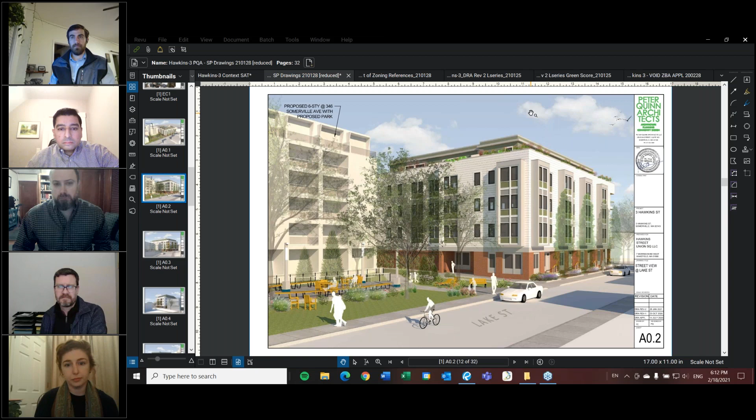With that, I'll take you through some of this, first let me show you the site itself. Can you all see my screen at this point? There we go, it says show my screen, so I'm going to assume that works. I'm now showing a context satellite view of the site.

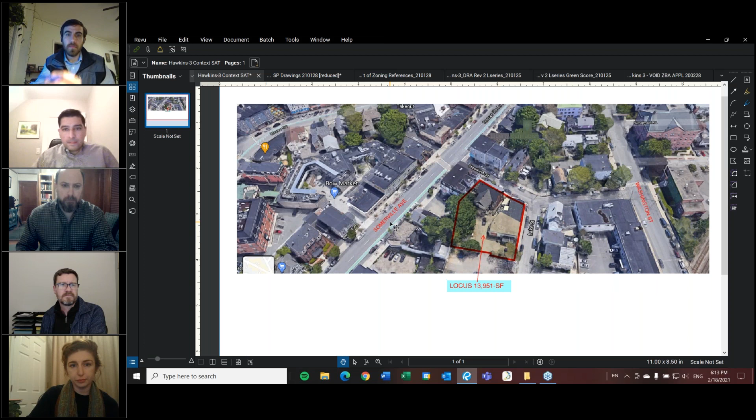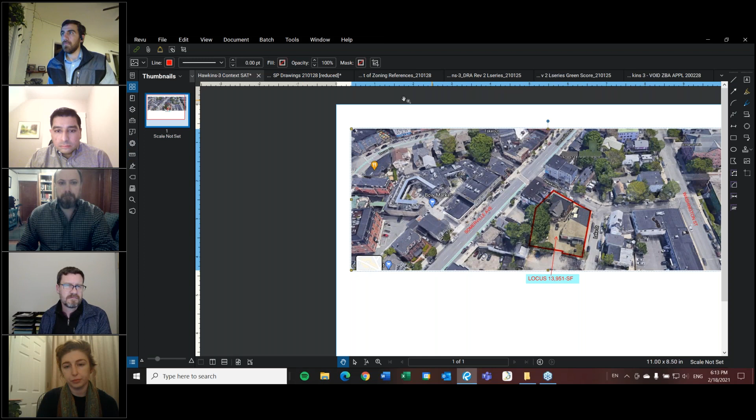You'll see Somerville Ave on the left, and Washington Street on the right. We've outlined the site, which is in a little valley connecting Somerville Ave to Washington, which is Hawkins Street, intersected by Lake at about the midpoint. This is currently an auto body shop, which would come down — we've already received demolition approval for it. Probably no love lost with these buildings.

In the neighborhood there is a 2.5-story wood frame building which has been empty for quite a while, and that would also come down. We received permission from the Historic Preservation Commission for that as well. So this is the auto body shop, it runs down Lake Street, as you can see.

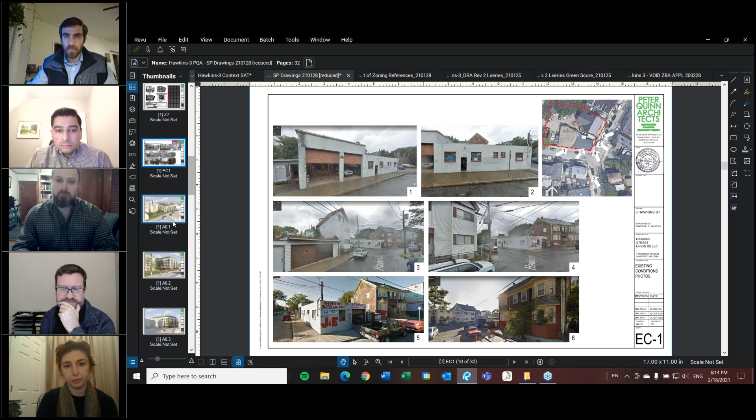The lot area that we have is approximately — hang on a second — 13,000, almost 14,000 square feet, so it's a fairly sizable piece of property. It abuts other MR5 districts, except across the street, where the neighbors are all NR. It has certainly been an industrial site for many, many years. Going back quite a ways, there is some cleanup on the site that has to be done.

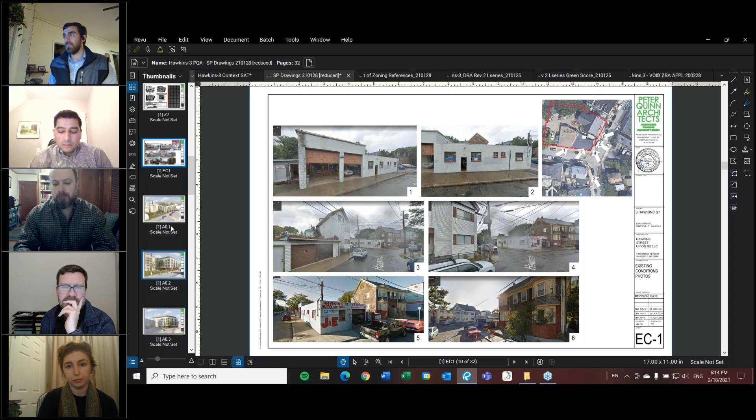We believe that we are compliant with zoning. We did an extensive zoning analysis, looking through all the different aspects of the new zoning. We had to go back quite a few times to get it right. It is quite a bit of material to present.

We also, as you know from the staff report, complied with the mobility report, the sustainable Somerville report, and the landscape urban forestry guidelines for green score.

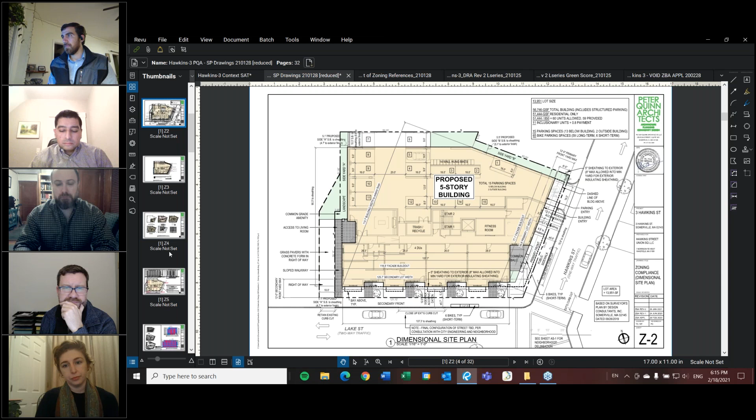The building itself is a 5-story building, but has setbacks. We presented, I think you can see this in this view here, as a 4-story along Lake Street, along the proposed park for the 346 Somerville Ave project, in which we share an elevation. And we stepped back for the 5th floor on these two sides. We've also presented townhouse-like entries for 4 residences along Lake Street to give a sense of scale and neighborhoodness to that streetscape there.

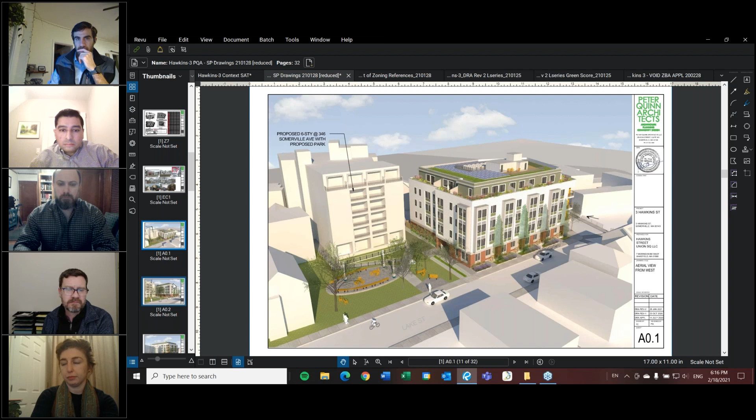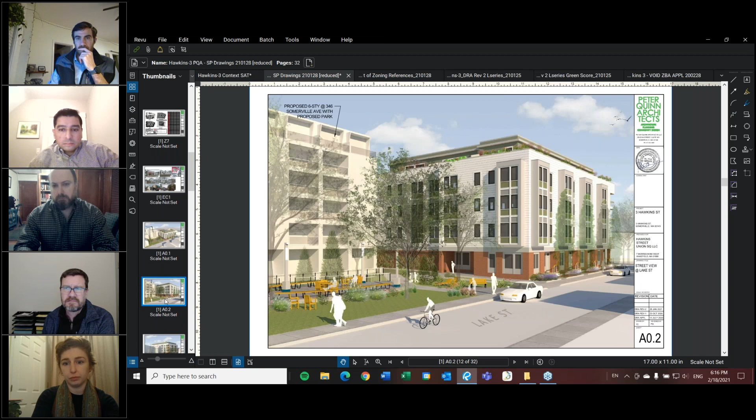Going a little further, this is a corner view that you would see as you come around. Coming down Hawkins, Lake Street is coming in from the left, and then Hawkins continues up to Somerville Ave on the right. So essentially what we have is a strong base made out of brick, and then 3 levels of residential that are outlined in a lighter colored paneling.

And then the 5th floor steps back respectfully on the 3 sides that you see from the street or from the park, in order to create roof balconies as well. And then at the very top, which you don't see in this except for maybe a little bit peeking out, is a common roof deck as well.

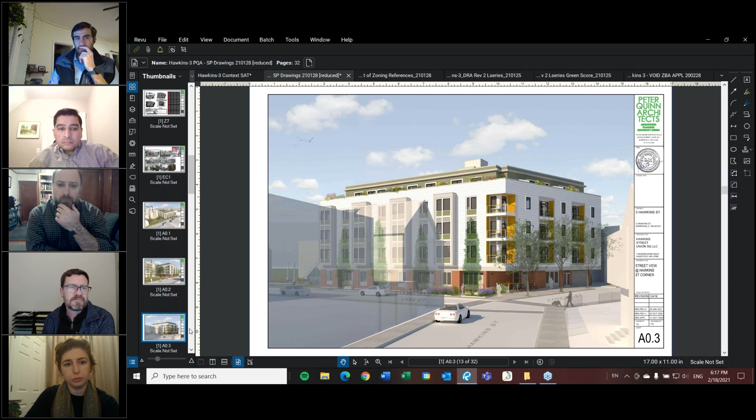There's a view further up Hawkins, actually standing in Somerville Ave. I think we don't show a building here that would block the view, but I just wanted to show essentially the context here.

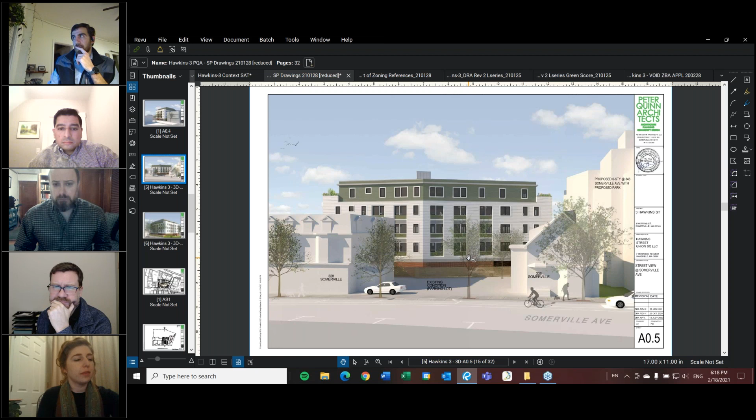And then finally, back from Somerville Ave, looking through what is now a parking lot, you see the side of the building, which is treated a little more plainly. This will eventually, we assume, be blocked by another building. And then finally, there's a corner view from the park itself, looking at the building that we have.

I'll take you through some plans now, especially the ground floor. So the building in this plan, the bottom of the page is Lake Street, and Hawkins Street is on the right. The corner would be coming in from the left-hand side. So the side facing Lake Street, as I mentioned, we create little townhouses that are actually just 1-story, 1-bedroom units with their own entries. They also have entries from the common hallway inside the building.

The interior of the building has a number of amenities. There's a nice lobby looking out to the street, a common balcony that all members can use and interact with neighbors. We also have a common room, which will likely be a small fitness room. And then we have a living room in the back that looks out to the park, which is on the left side of this page. That'll be quite a nice amenity and could be used as a community room as well, open to scheduled meetings with neighborhood people, presentations, and that kind of thing.

We have what I would call an open garage. It's not heated, for 13 cars, and then 2 additional spaces outside that garage for a total of 15 spaces, which gives a ratio of about 0.25 spaces per unit. We're a 59-unit building.

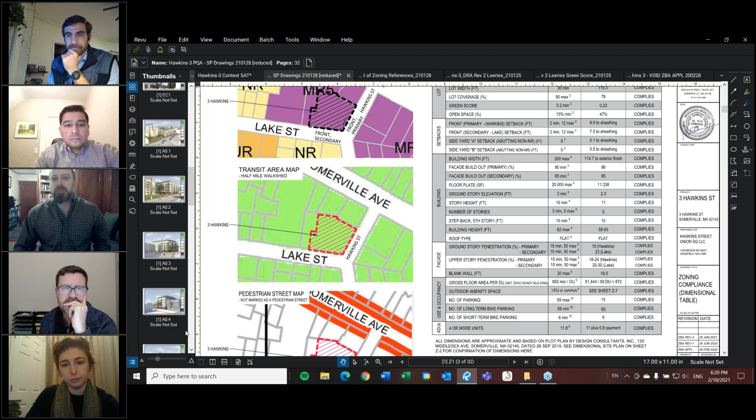Shall I continue? Yes, please. All right, so we have an extensive bike parking program in this building.

We have short-term bike spaces around the perimeter of the building, integrated into the sidewalk areas. We also have wall-hung bikes in the garage itself, and then an oversized elevator to take bikes down to a basement level where we have a very large bike storage room and workshop for repairs and cleaning bikes. We have a large space for storage of cargo bikes or tandems. We can fit those as well.

And we have space to expand the bike program if needed. There would not be a problem to do that. However, this is a limited basement, as I mentioned, the water table is an issue here. So we are just limiting it primarily to this residential use and some utility rooms, this residential bike room and utility rooms.

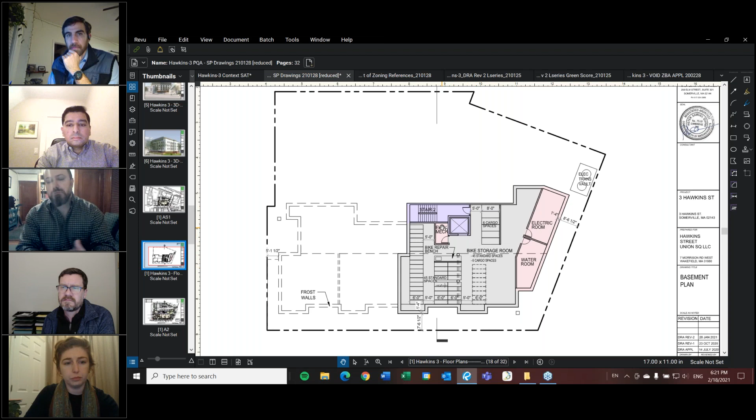The other aspects of this, of course, we're going to pre-wire at least 4 charging stations for electric cars. We do have a package and mail room, which will provide enough space for normal package delivery. That's in this vestibule area.

Moving on a little bit, one of the things that we had misinterpreted on the zoning was the need for a 12-foot wide sidewalk area. Our landscape architect will talk a little bit about how we handled that later on. But what we did is we pushed the building back from our original design in order to create a 12-foot area that could be used for sidewalk.

We left the existing sidewalk as it is and then put in ground cover for that additional area. We did not use that ground cover in our green score calculation, we just provided it as a visual amenity. And we do have some trees planted in that area, which we can talk about later, but the idea was to push the building back in order to not impose the mass of the building so strongly on the sidewalk, and I think we've accomplished that. We've done that by leaving the 12 feet of sidewalk area plus about another 2 feet of setback that's required in this district, so a total of 14 feet from the curb line.

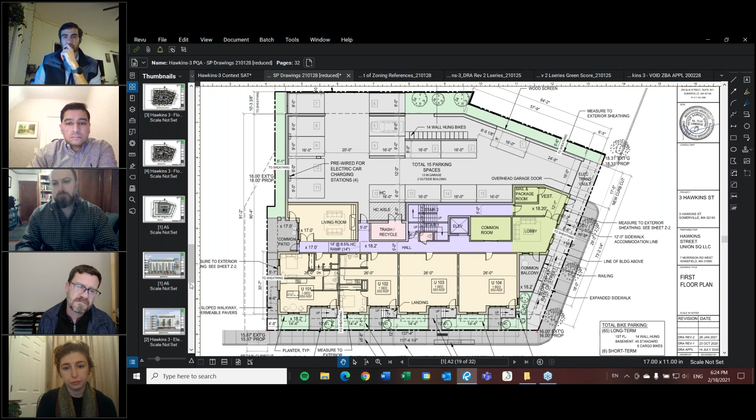Our materials are fairly straightforward. As I mentioned, we do have a pretty significant exterior requirement with the insulation, so we are limited on putting any kind of heavy material on the exterior - we have to be very careful about that because of the cantilevered weight of all that. So we are using a fiber cement lap siding with an 11-inch exposure, which is a little lighter than normal, and then fiber cement panels. We have a brick base, brick veneer base with a sort of contemporary colored mortar, and all the trim is fiber cement as well.

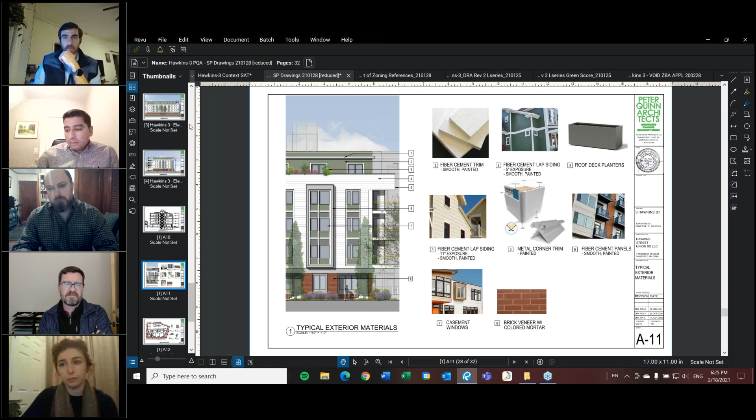We are holding up some pretty significant roof decks, roof planters, so those are actually spec'd as kind of an aesthetic element as well. I should show you the plan for the roof deck.

This has a more ornate version of this, but we've got about 2,000 square feet set up for solar panels generating electricity, and then all of our condensers are collected in the middle of the roof where they will not be visible from the street. And then we have a roof deck which is about 700 square feet, and a small landing and lobby at that area.

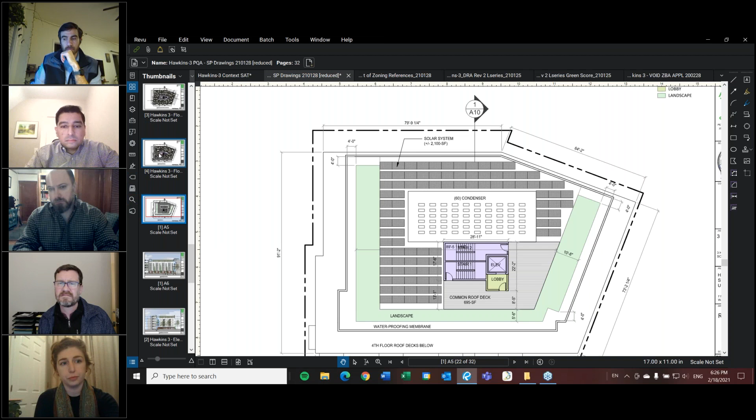So this is open to all of the residents, although some of the units do have their own private balconies, especially on the 5th floor. I think we've exceeded the usable unit open space by quite a bit for this building.

So I just want to mention before I finish the conditions—actually, why don't I come back to that? I'm going to pass the screen to Erin so that she can talk a little bit about the landscape plans as well. I'll bring those up.

Okay, thank you Peter. So delving into the landscape plan with the new setback of the building—yes, Erin Hosseini Fitch from Verdant Landscape Architecture.

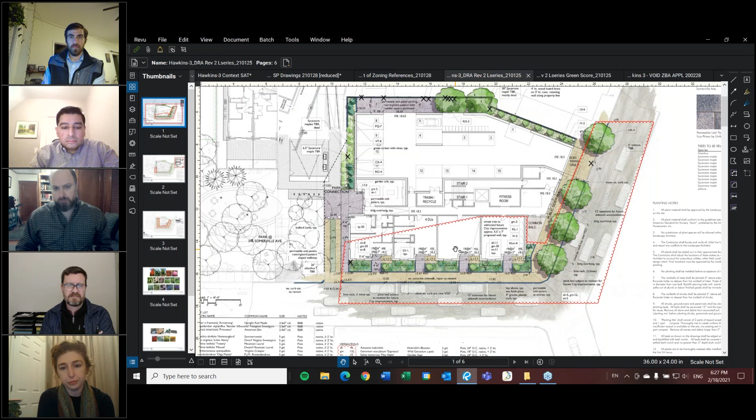With the new building setback, we have a much larger buffer between the building facade and the sidewalk, as Peter mentioned. Within the space, we're able to incorporate a larger plant bed full of mixed perennial plantings, keeping in mind that if any future changes were to happen within the 12-foot easement for the sidewalks, this could easily be done with only the perennial plantings.

Within the space, we're also incorporating deciduous upright trees that complement the architecture but also act as street trees. In the case that the sidewalk was to be widened, the street trees would remain in place, so it'd still be a pleasing path for pedestrians to walk by.

Along Hawkins Street, we're able to maintain a minimum 6-foot width sidewalk along the whole stretch, and we're also proposing large shade trees, making it a very comfortable and pleasant pedestrian streetscape.

Along the northern and western property lines, the plants proposed are used to create year-round screening and privacy for the abutters and for our site as well. Shade trees and upright trees are also used in these instances.

And back on the western property, going toward Lake Street, we are including an accessible connection to the new public park. As Peter mentioned, Verdant is also involved with this, so throughout the entire process we're making sure both of these sites are integrated to create a very residential and community feeling between these two senses of space.

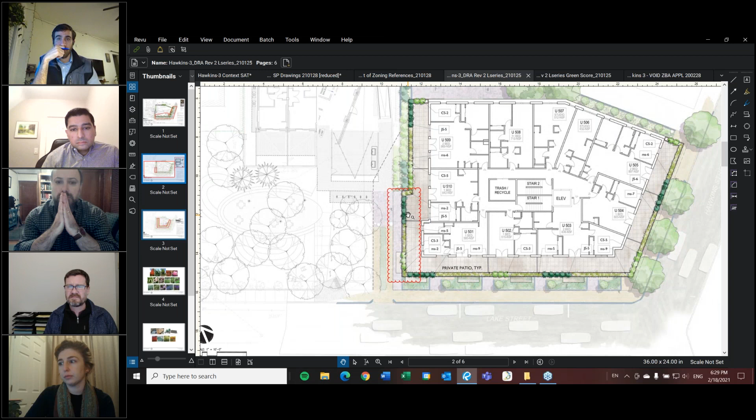Moving on to the 5th floor roof decks—as Peter mentioned, these are private patios for the various units on this floor. Bordering all these patios are planters that will provide year-round screening and interest, as they are not seasonal; they're actually permanent planters that are a mix of shrubs and ornamental grasses.

Moving on to the roof deck, we're proposing an expanse of extensive green roof to create a sustainable environment and also a pleasing aesthetic for those using the common roof deck. We're using sedum-mix trays in this area.

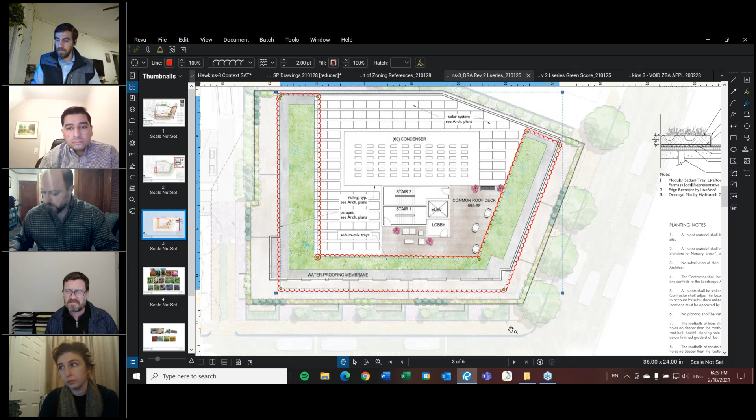A brief overview of our plantings: the majority of the plants selected are hardy native species that will succeed in this environment, with the addition of a few other plantings chosen for their hardiness as well as their aesthetic. You can see the upright tree here, as well as maples and other native species.

Straightforward materials for our roof deck—we're using pedestal pavers. You can also see the year-round interest of the red-twig dogwood and junipers used on the roof decks.

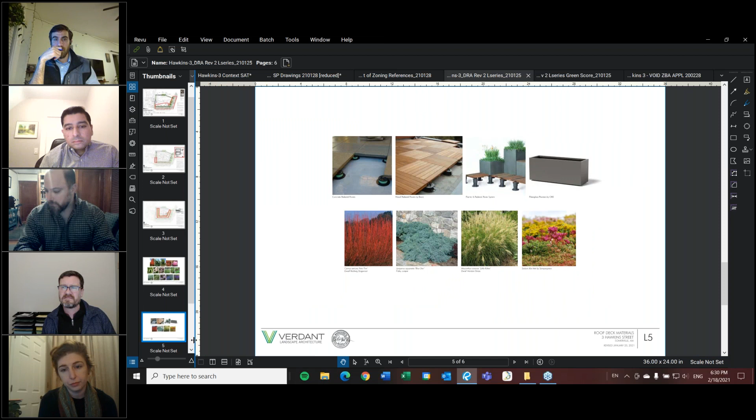And lastly, we have our green score. As you can see, we exceed the minimum requirement of 0.20, reaching 0.23 throughout the 3 landscape plans. On the other set, we have supporting details to show our compliance.

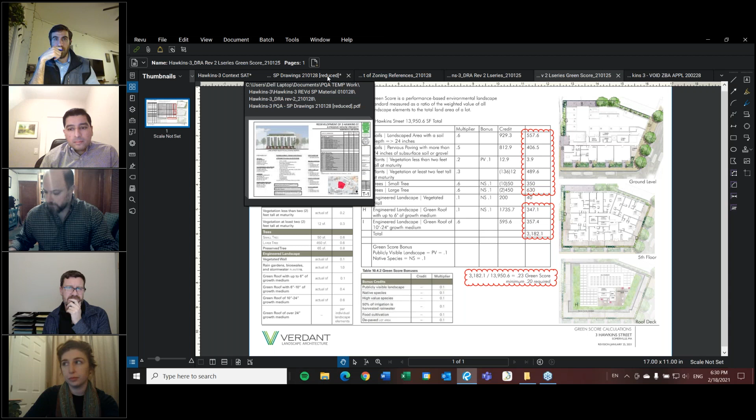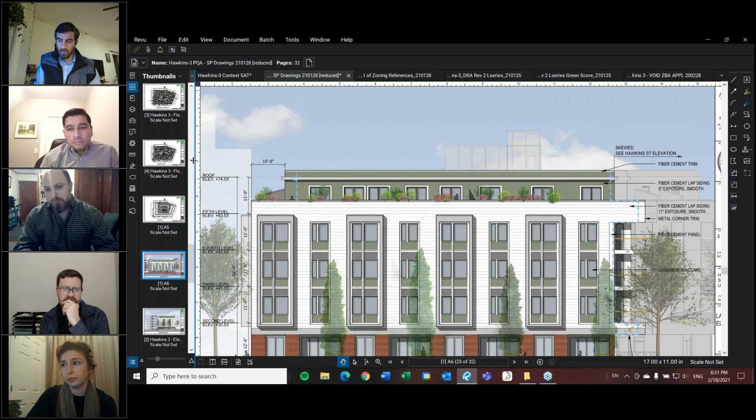Thanks, Erin. So I'll just finish by saying that we have read through the conditions and have no issues with any of them. One issue brought up was traffic mitigation—participating in pedestrian crossings, curb extensions, and the like. This is something we've discussed with the neighborhood from the very beginning, and we'd very much like to engage in that design process with the neighborhood, the engineering department, and traffic department to get that right. So no problem there whatsoever. All the other matters are things we expect to comply with completely.

And I'll pass it back to you folks. Thank you.

So what I'd like to do is open it up to any members of the planning board who would like to ask questions or comments of the development team or of staff at this point. No? Okay, I have questions, but I also plan to hold mine until after the Q&A and public hearing. Great, thanks Rob.

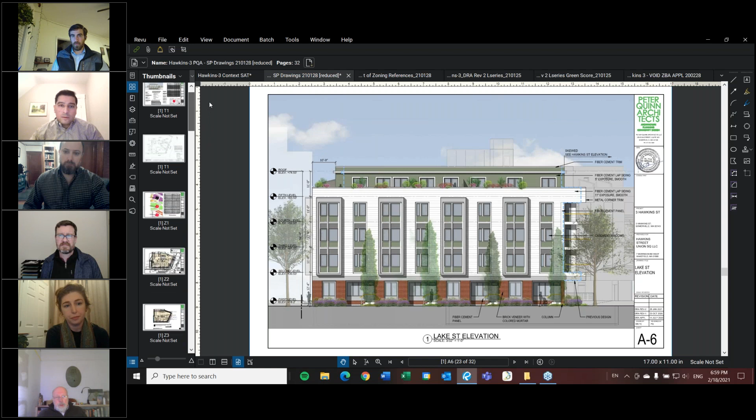All right. Yes, the passive house does limit the amount of window that you're allowed. We pushed it pretty far. That's not really answering the question at hand, but I just do want to say that. So Hawkins Street, as it works right now, has parking on both sides and is fairly tight.

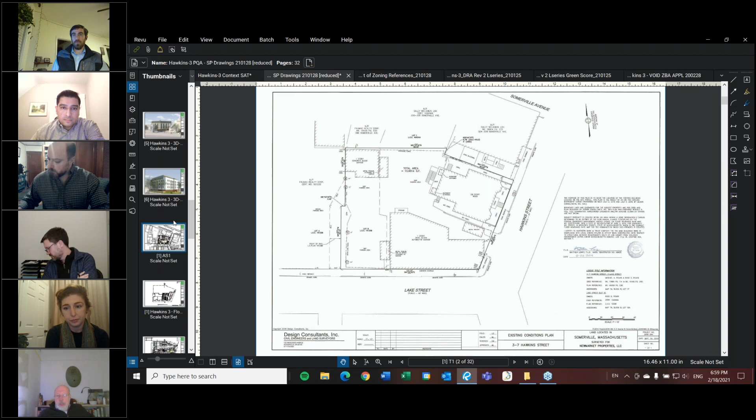We know that, and to JT's point, we had actually proposed reshaping the sidewalk on city property to create a drop off, then have the sidewalk exclusively on the applicant's property. That was a concept we wanted to put out there to the neighborhood. It's something we'd like to see, and we may end up being able to do that in this area. But I think it has to be part of the whole plan to redo these street curbs and create the crossings. This is left over from our original plan, this crossing and raised intersection here.

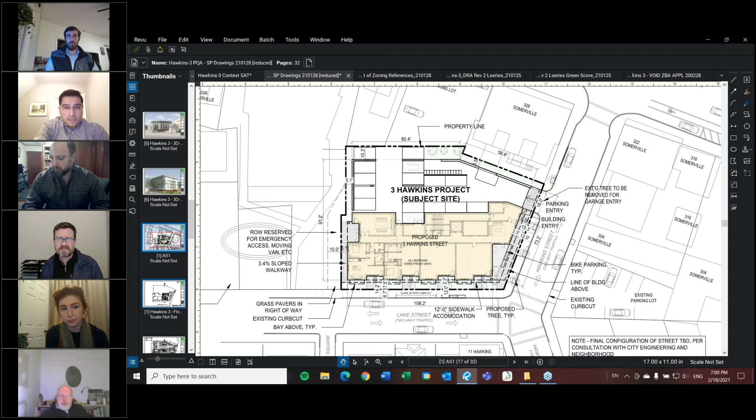So we have a trash room with compactors. It's kind of a funny drawing, bear with me a second. These actually have compactors in them directly, with chutes upstairs that go right into this. So we would be able to bring the trash containers out to the street at the scheduled time. They can park here on the side temporarily in order to meet that moment when they come.

Also, you can see in this drawing there is an electric vault placed in our part of the sidewalk that is all underground. So that is already planned into this process, into this plan. We will not have a transformer that will be on grade, as you see in other developments.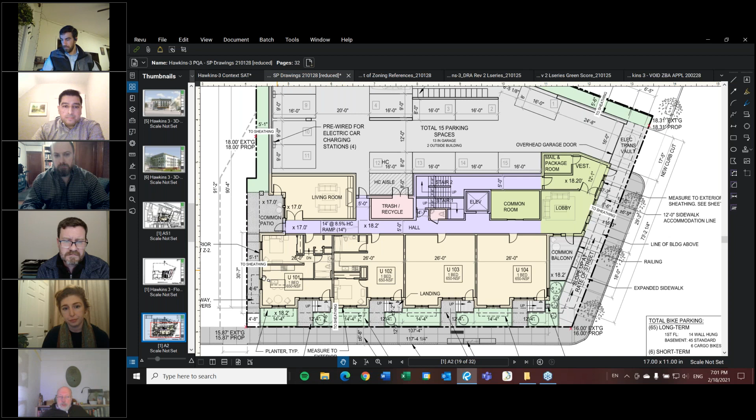Over on this side, what is being referred to by JT and others is that there is a piece of land that is actually on the neighboring property, but it's reserved as a right of way for our lot. So we have proposed to finish it with grass and paver strips.

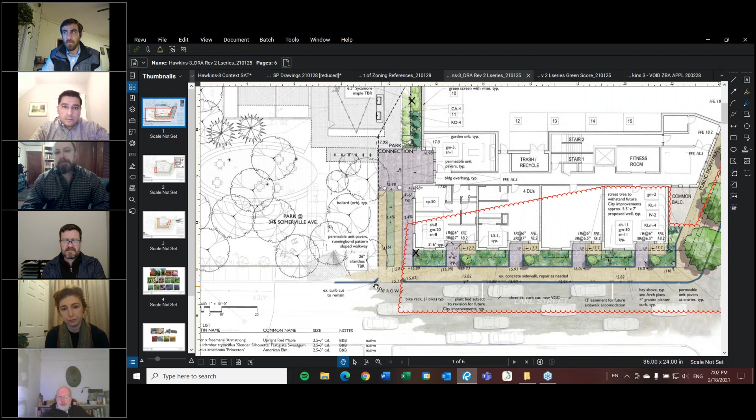This is to be used for emergency access, for moving on a scheduled basis, so that somebody can get in there and leave a small moving truck and come into the building on the secondary entry. But it's not intended to be a regular parking space at all, it would just be used on a temporary basis.

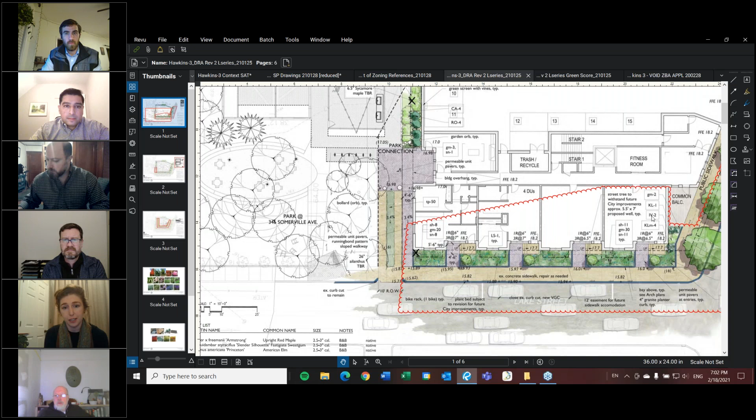I think with that, I may have answered all the questions that have accumulated. I've already said that the brick is full bed. Thank you for the clarification. I think in many or all technical aspects, this is a really fantastic project, so I'm very excited to see it go through these last few steps and move forward. Thank you.

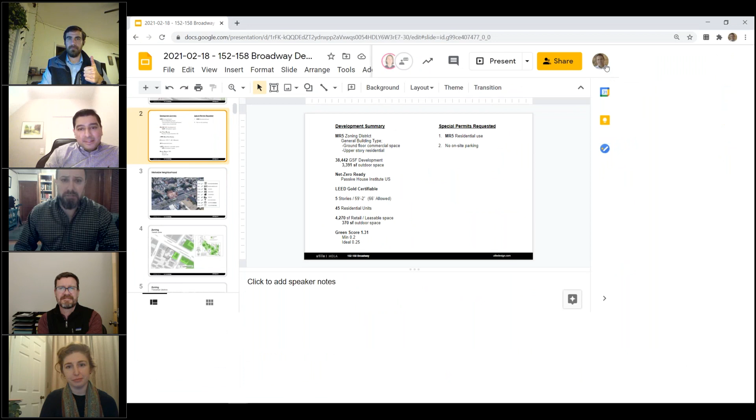Okay. Mr. DiGirolamo, you are self-muted. Hi, I'm sorry, can the board hear me? Rich, before you go, can the board hear me as well? Yes, we can hear you both. Okay, can you see my screen? I'm sorry Rich, I just wanted to—does it show the title slide with 152, 158 Broadway on it? No, it shows a ton of icons on a desktop that's stressing me out. Oh, all right, hold on, I think I might need to—okay, let me know if you see it now. Yes, okay great. All right Rich, sorry about that.

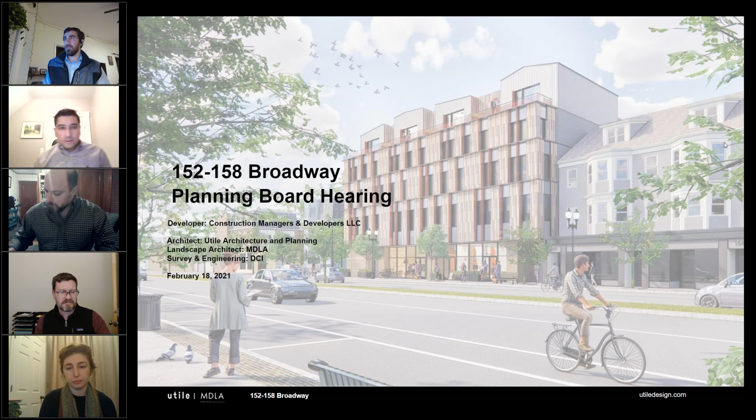Steve Siragusa, who's part of the team who will be presenting shortly, will provide some empirical evidence in that regard. The building is intended to be a rental building. The proposal does provide a total of 58 long-term and short-term bicycle parking spaces.

The project has had extensive neighborhood input. There have been 2 neighborhood meetings, both sponsored by Councilor McLaughlin, and an appearance before the Urban Design Commission, who approved the design and the site. The proposal requires 2 special permits, one for the use, household living, the other for relief from parking. Additionally, we are requiring site plan approval.

Mr. Chairman, our presentation this evening will be by PowerPoint. The PowerPoint will touch upon the zoning criteria needed for your board to make findings on the special permits and on site plan review. At this time, I'd like to introduce the team who will be presenting.

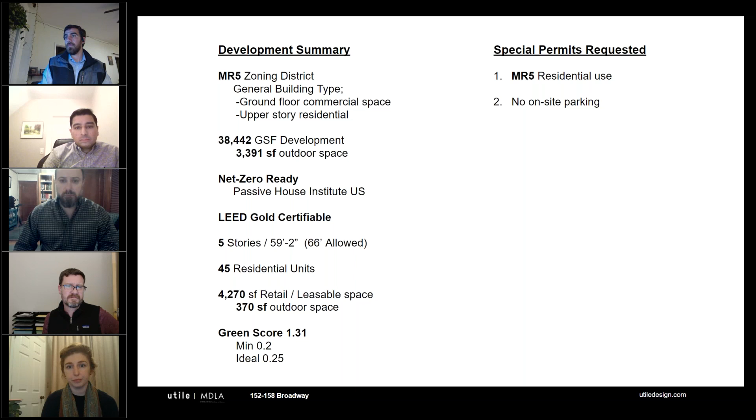I just want to quickly address one of our special permits, which is for no parking here. We did a pretty extensive study of this neighborhood. You all know it really well, I'm sure. But we are just on that brink of being half a mile from the T station. We'll show you exactly where we are relative to the walk zone. We also have, within a few hundred feet, 4 different bus lines. There's grocery stores, post office, convenience stores, takeouts, bars, restaurants, shopping, and park space, all very close by to this site. It's an eminently walkable site.

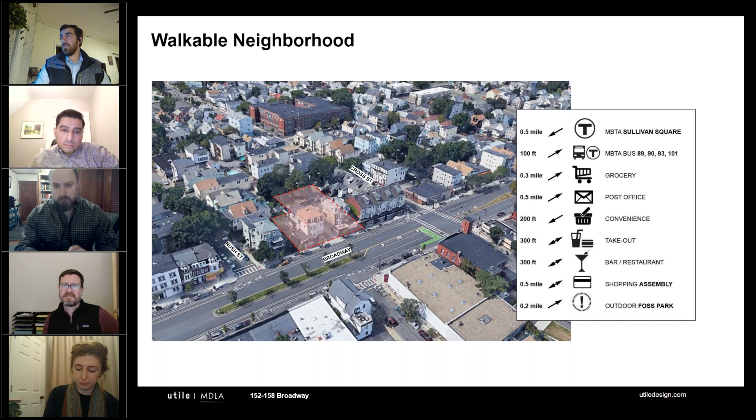This site is designated in the pedestrian zone, one that we think is going to be a great place to live without a vehicle. I'm going to hand it over to Steve to talk a little bit more about the parking and transit issues.

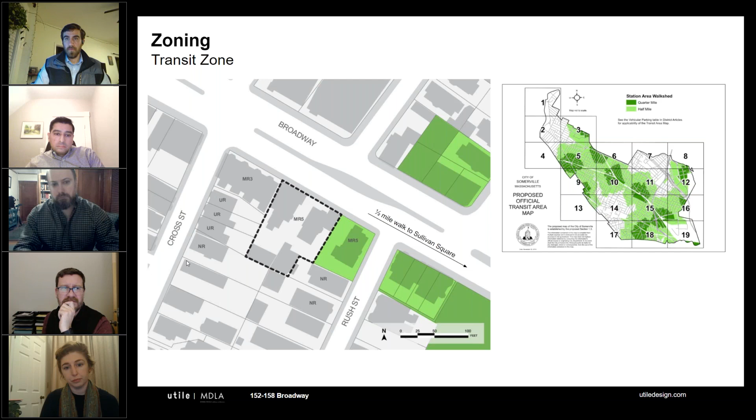As Rich and Michael were both saying, we're located just adjacent to that 0.5 mile transit area, which would be the Sullivan Square Walkshed. If within that area, as you guys are aware, we wouldn't need any parking required on site. So that is what we're proposing. Again, as Michael was saying, we're located along a pedestrian street which connects directly to Sullivan Square as well as Central Broadway. There's 4 bus routes within 100 feet of the site, and 4 additional routes within a half mile of the site.

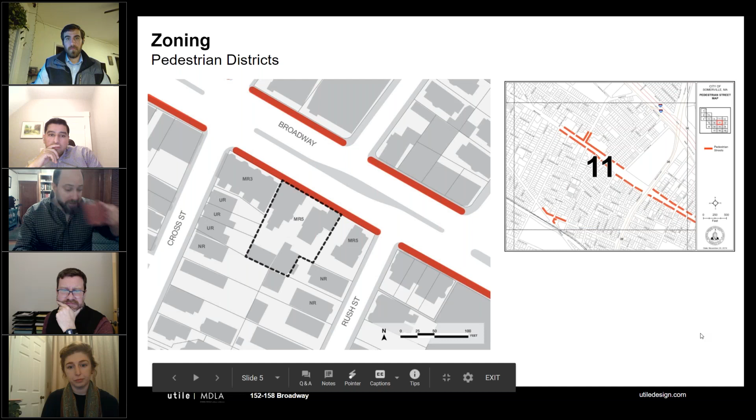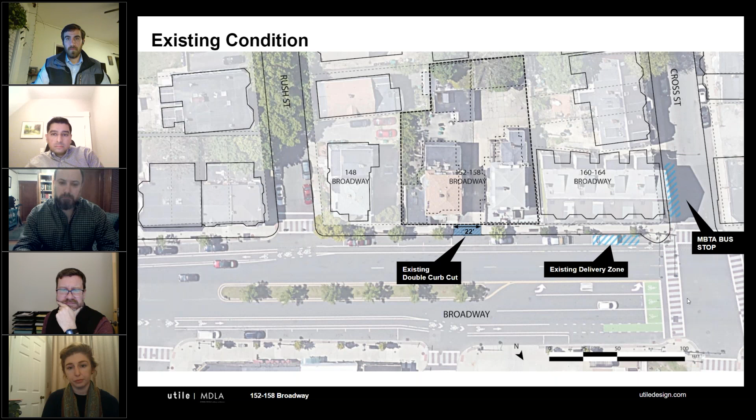We're closing a curb cut, as you'll see on the next slide. It's desirable in this zone, the MR5 district, that no new developments have a curb cut along a designated pedestrian street. So what we're proposing is to close that double curb cut, which is 22 feet wide now and serves 2 separate driveways.

Instead, we'll create an additional loading zone along Broadway. I know that's a concern, but we want pickup drop-offs for Uber, Lyft, deliveries, without on-site parking. We will not be getting rid of any on-street parking along Broadway — there will still be 4 metered parking spaces. We'll just be shifting them west towards McGrath Highway and creating a 30-foot loading zone at the corner of Rush Street.

There's no on-site parking, but it's expected there will still be vehicle trips to the site — move in, move out, ride shares, food deliveries, and things like that. We worked directly with the mobility department to come up with this design, and they've approved it through the mobility management plan we put together, so it's already been vetted. We think this is a good compromise to keep all the on-street parking while accommodating those inevitable vehicle trips.

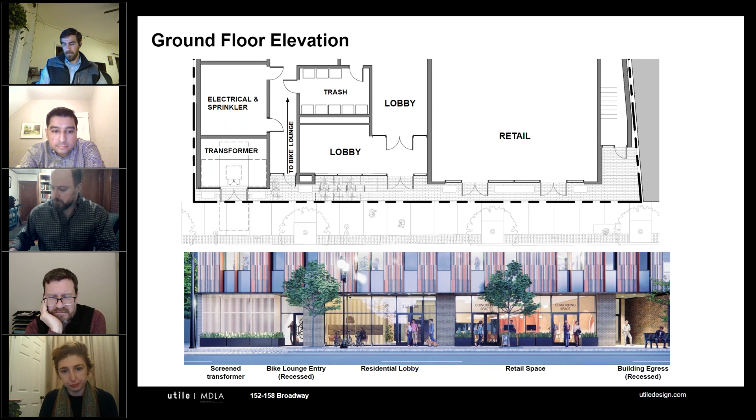So just getting into the unit mix, we have 33 market rate studio units, 7 affordable studio units, 2 affordable 3-bedroom family units, and then 3 one-bed units for a total of 45.

These are all going to be really well designed, very attractive units that we think will be attractive to young professionals and seniors who are wanting to live without roommates. We think this is a really important characteristic of this building, particularly in the event of another quarantine.

I can tell you, some of the young architects who work in our office have roommates who either work at a restaurant or grocery store, and that gets them very nervous. They don't feel comfortable with that, or they have roommates who are also on Zoom calls all day long, making it very difficult for them to be in the same apartment.

So this we feel is a pretty desirable opportunity for people to be able to live on their own. This also takes the burden off of a lot of the existing family units in the neighborhood, which should be used for families, and weren't really designed for a single or a couple to be living in.

These types of units are explicitly encouraged in the new zoning in these pedestrian zones, particularly on the upper floors. We're conforming to all of the side yards, front yards, backyards, and the step backs as we move up and down the building. Just wanted to point out a few things here.

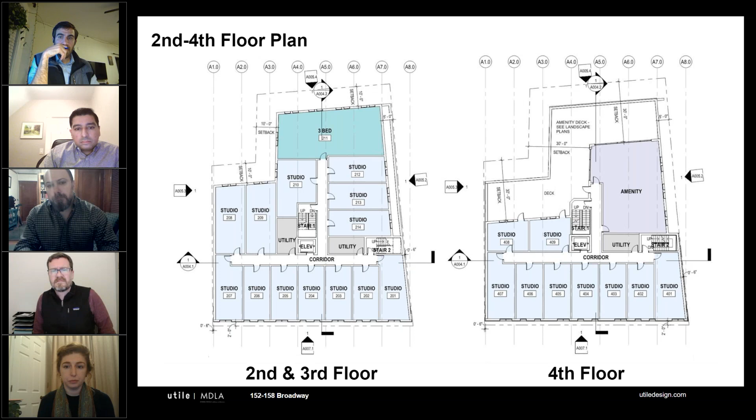You can see how we're laying out the studios, and how the 3-beds lay out on the sunny side of the building. Up on the 4th floor where we have to step back, we're using that as an opportunity to create a really great amenity space for the building as well as outdoor space. You'll see that in more detail, how that outdoor space lays out from the landscape architect. And with that, I'll hand it off to Michael to talk about the landscape.

Michael, you there? I think I'm unmuted now. Good evening, everyone. I'm Mike D'Angelo, landscape architect. So we're opening this slide up.

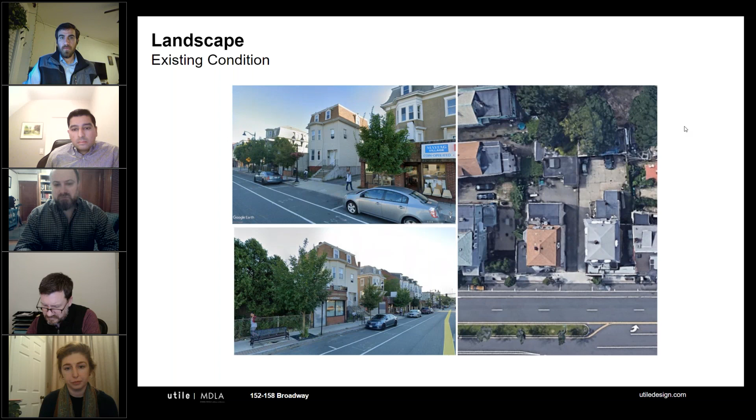This is the existing conditions, just to show that existing curb cut that we will be closing. Generally speaking, the idea for our landscape design along the streetscape is to fill in that curb cut, continue that brick strip along the curb, and continue the streetscape that the city of Somerville has already developed in that area.

Next slide, please. So here's the plan. You can see that curb cut has been filled in, and we're matching the existing streetscape treatment. There's some existing benches, some light poles, some existing trees which are in really good shape that we will definitely try to do our best to maintain and use best practices.

Along the building facade, you'll see we have some special pavers. We're using permeable plank pavers. There's some additional outdoor bike racks in the front there, as well as some movable planters along the front to introduce some green along that facade.

In the rear of the building, as Michael mentions, we have this really cool outdoor workstation for bikes on the left side there, which works nicely with the interior program with the bike storage area. You'll also see a small dog run, and an area adjacent to the retail - we're not sure what that retail is going to be, but it's a nice little outdoor space for them back there. Surrounding the back property line is a row of 47 fastigiate hornbeam trees to really provide a lot of green to that property line edge.

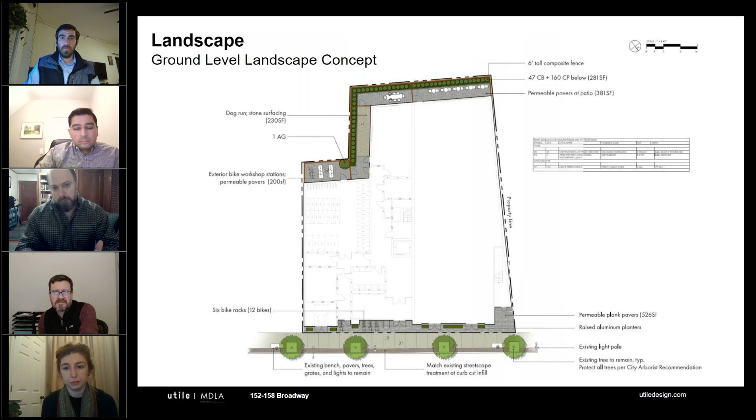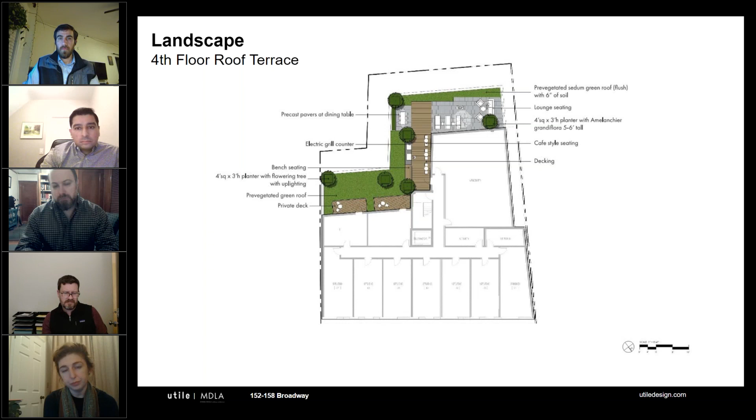Next slide, please. This is the 4th floor amenity terrace. You'll see that the large green area is vegetated green roof, so sedum. There's a couple private decks on the left, and to the right, that's the common amenity space adjacent to the interior common amenity space. There's a couple electric grills, a dining area, a place to sit down, a lounge area, and some chaise lounge chairs, so multiple groups could use that space at one time given the different programming.

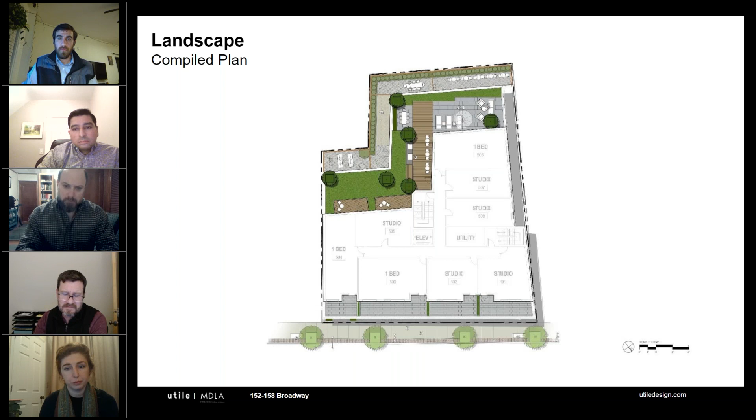Next slide, please. And this is the compiled plan, just to show you the amount of green that we have on this project. It shows all of the green spaces on one sheet. Next slide, please.

That's it, so that's all we have. We wanted to keep it short because we know your time's valuable. And if you have any questions, please let us know.

Thank you. I will have comments and I will have questions. As I have previously said, I try to reserve mine until we've heard public testimony. If members of the board have questions at this time, I would invite you to ask them. Otherwise, I will ask staff - I think Rebecca, this was yours.

Mr. Chair, this is Rebecca speaking. I don't have anything particular to add. I will note that there is a Mr. Tom Lamar who has indicated that he wants to speak by raising his hand, but I think he may not be part of the applicant team, as I understand it.

Okay, well, no, I do not see - I see a question, but that's not part of the record. Mr. Lamar is confirming that he is a member of the public.

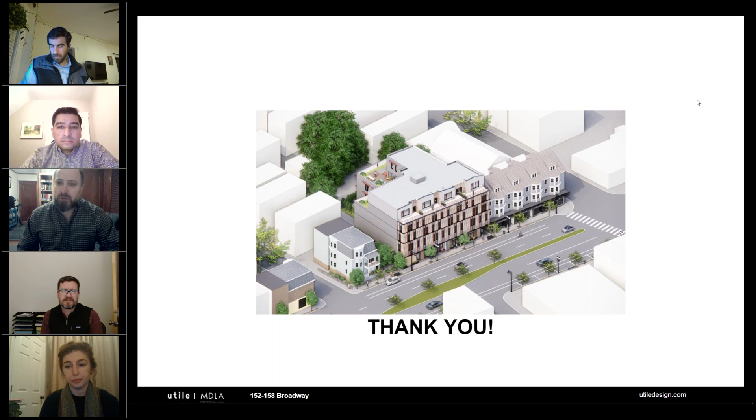Okay, so at this time, what I'd like to do is open up the hearing to anyone in the audience that wants to speak in support of the application. Please raise your hand and I will call on you in the order in which I see you. Right now I see two - I see Tom Lamar and I see Jeff Burns.

So I'm going to call on Mr. Burns first, because I saw him first. So if Jeff Burns could please be unmuted. As a reminder, you have a 2-minute time, and please introduce yourself and give your residential address for the record.

Hi, I'm Jeff Burns. I live at 294 Summer Street, and I want to speak in favor of this proposal. Similar to the Hawkins Street proposal, this one leans into the same things that our zoning is set up to encourage. Obviously, being just outside of the half-mile transit-oriented zoning area, it does need a little extra permission to do what it says to do, which is zero parking, which goes beyond what the Hawkins Street proposal offers with its small but still somewhat parking.

As someone who's lived in Somerville for a while without a car at all, and has lived in the area without a car for almost 20 years, I think this is great. I think there's lots of folks who would really love to have a place where they go where, hey, I don't have a car, I don't need a car. It's close to a train station, it's close to buses, it's got lots of bike amenities. This is my spot, this is for me. Because there aren't a lot of places that really lean into that, and here is one.

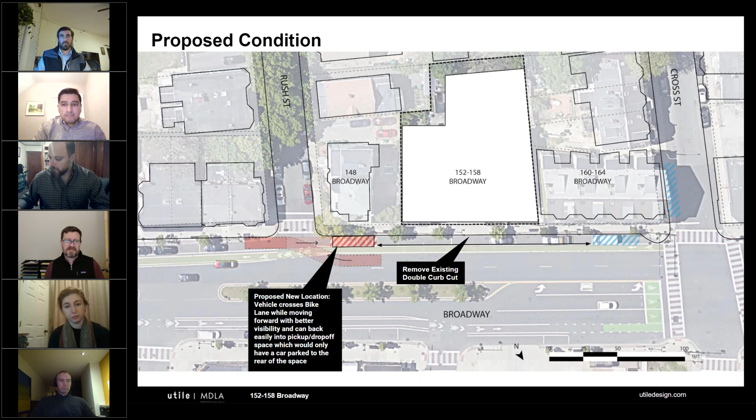Yes, Mr. Chair, this is Rebecca Cooper. Through you to Member Habib, I will note that there is an exemption for parking requirements. I never want to quote numbers, but this does not meet the threshold for requiring parking for retail use of that space. Great, thank you very much.

Okay, wonderful. There were just a couple other comments if you wanted me to address those. I would welcome you to address anything that you think is important for this board to hear.

I did want to talk about the penthouse, because I know it isn't what you would consider the typical design solution. When we went through it with the UDC, they were more than pleased with that particular part of the project, and felt like it was a far superior solution, one that they wouldn't have thought of and one that they really quite liked. It gave a sort of breakdown of scale, a breakdown of a hard cornice line at the very top of the building, and they really did quite like the contextual references of it. So I understand it isn't probably the standard, the kind of ubiquitous solution you'd see most anywhere, but it was one the UDC was particularly supportive of and in favor of. Just wanted to make sure we let you know that.

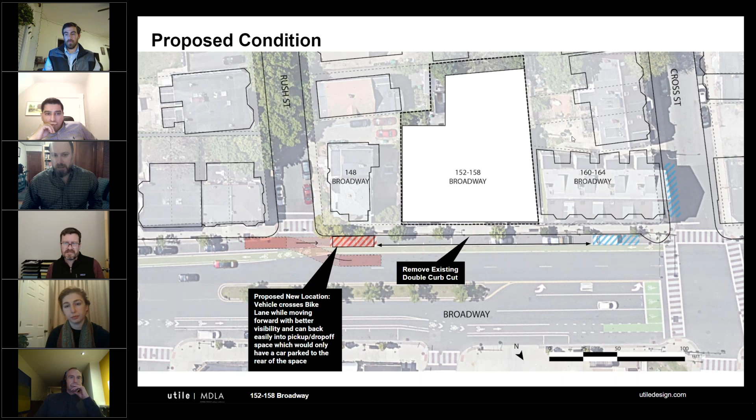I don't think there were any others. I think there was really parking, loading, we talked about unit sizes, and then just those couple of design issues. Was there anything else? There was not, but as I'm scrolling through your plans now, there was one that I had actually thought of and neglected to raise when I spoke earlier.

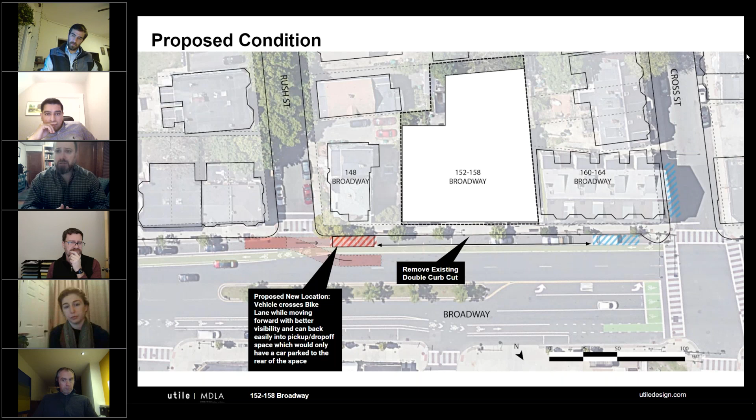So if you wouldn't mind this concern, as I'm scrolling through your plans right now, it doesn't appear as though—and maybe your images can ameliorate my concern—that the sides of your buildings look particularly plain. That is concerning to me because traditionally this board has requested that all sides of the building that people can see, even if it's in the back of the building, if it faces the highway for example, looks like something that's not just a blank slate. So my concern is that it just looks like nothing on the sides of the building, particularly when you've got a street in between you and someone else.

It's not like the image you've got up here where one side of the building is largely obscured by the building next to it on the right. I'd like to see a rendering where at least the sides of the building that people are going to see look like something that's not just a blank wall. I don't know if you were intending to put up lighting or artwork or anything—I understand you're not necessarily going to put windows there because I'm not sure what's on that side of the building—but anything that doesn't look just like a blank wall. I meant to raise that earlier, and I'm sorry I didn't at that time. I was kind of scrolling through the application again before we move on from it this evening.

And I'd hope that you could address that, because including buildings that have been built under the new zoning in Union Square, where the backs of the buildings abutted other buildings and other streets, this board required that the backs of the buildings look like something that weren't just backs of buildings.

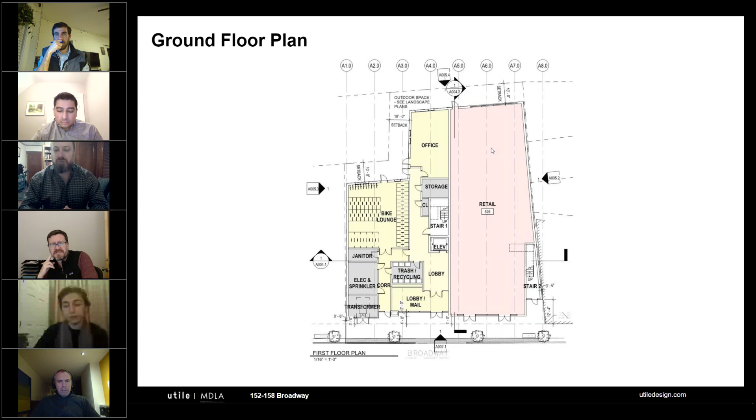What I would ask then, Mr. Lund, is the next time you come before us in a few weeks, because I'm going to ask the record to be left open for written testimony as well, I'd like somebody to give us, if meeting in person, the materials you intend to use. But I do have a board at the back here which would show the materials. Hold on.

Here we go. Okay, so this is going to be the brick along the front at the ground floor. This is the öko skin detail I was talking about earlier. The composite aluminum panel, which would be just below the windows, is a kind of really robust, expensive version of a metal panel that will anchor where the windows are relative to the floors. This is the cementitious clapboard we'd be using on the sides of the building, and up at the very top, this is the standing seam metal roof. So I don't know if that helps at all.

That actually does help me a little bit, because it wasn't apparent with the renderings shown earlier. I don't know, it looks like we've got... I think Rob raised his hand.

I'd like to hear the members' comments as well as staff's on the materiality being used, because it's always something that's a concern to me, without a guarantee that the building next to you is going to cover that up in 2 years.

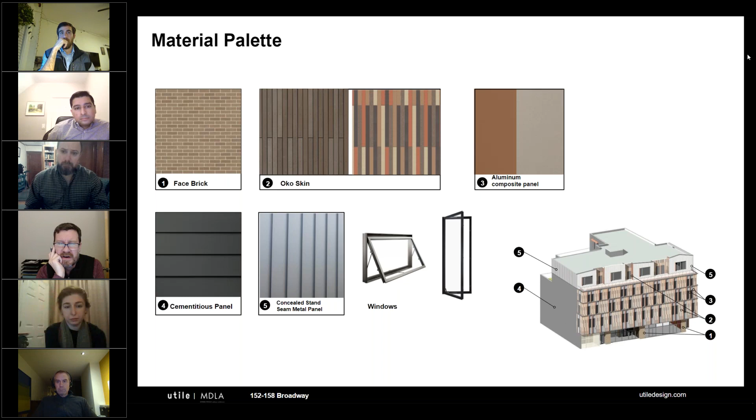Yeah, I would just say, on this very point, I don't know, Mr. LeBlanc, or who's in charge of the slides, but if you could go back to that view looking, I guess, west, that you had up just of the rendering.

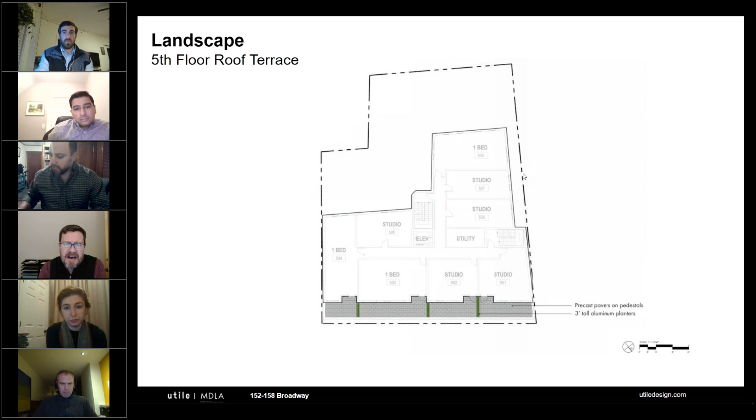It was, back a few more. This one or this one? Yeah, this one. Oh, the other one.

One consideration - and it sounds like you're going to go away and do some thinking on this. I'm not an architect, and I very much respect the UDC. One thought: if you considered even a 1 foot, 5th floor side setback on each side, and created a little more definition between your 4th floor and 5th floor, maybe making that cornice a little stronger. I just think bringing the massing down on the 5th floor and creating more side differentiation is one potential way to address the chair's concerns, and concerns I have too.

I'm sure this will get developed at some point in the future, but I can hear and see and understand the concern.

Yeah, I think if we thought the building next door was never going to get developed, I'd say that's a great solution and something we'd be happy to consider. But if it does get built right next door, we'd be looking at a 1 foot, or very small gap between the two buildings, which would probably be a real problem for maintenance, stuff collecting there. If we were on a corner, we'd be wrapping the whole front facade on the side anyway. But I do worry that if and when that neighboring property gets developed, they're very likely to go right against our building, which would create a potential problem for us.